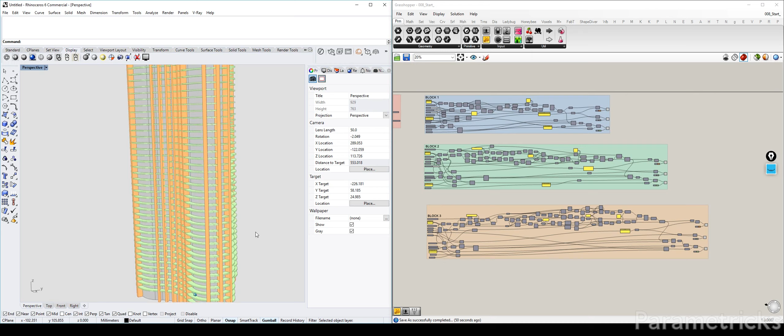In this part we will be finishing off the minor details of our tower, mainly focusing on the top floors and the glass balustrade. Those are basically the two main things that we'll be tackling.

The first thing we're going to tackle is the floor, the roof terraces. If you remember correctly on Google searches, let me open this one for example, you will see in this render, on top of each of these block sections, there is this kind of a roof terrace going on. So that's what we're going to recreate here.

Now the simplest way to do is to modify the extrusion of our core, which is the gray one. If I zoom into block one and highlight that, the green one is the core, and that basically comes from an extrusion from a boundary plane with a specific height. This height was determined by the amount of floors that we have times the height of each floor.

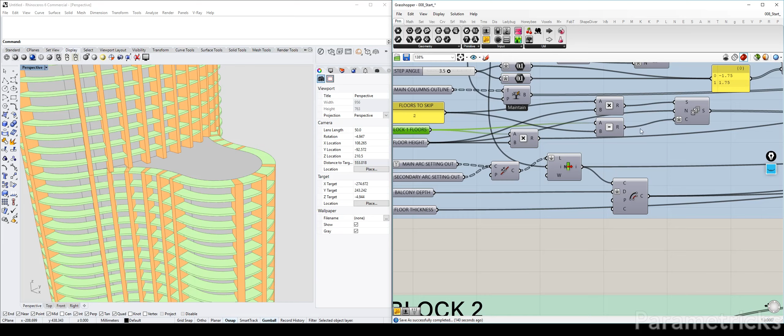So the easiest way to do this is to minus the extrusion height of one floor. Let's track that back down here. We have the amount of floors and the floor height. Since these two components are not only used for our extrusion of the core, we will not be modifying that, but instead let's have a look at where we can modify it at the end of our results, between the z vector and the extrusion direction.

So we're gonna create a simple evaluate command. You can also do this with a subtraction, because what we will be doing is basically the height that we have here minus the floor height. Let's drag that all the way down to the y. The expression will be x minus y, which is why you can also use a subtraction, which works fine.

Now that we have the number, what we can do is copy the z direction and use that one to drive our extrusion. So you can see now our extrusion is the height minus one floor. But now this creates a problem because now our tower is basically like floating. So now we have to fix a few more things.

I think to do those fixes, we can move on to the next block, which is the above, because we know if you look here, some of these columns, mainly the ones in the front, will have to run down a bit more. So that's what we're going to tackle.

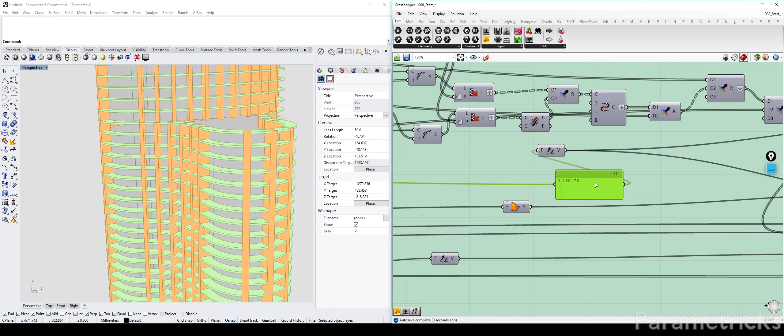So the data comes from here. What we need to do is actually swap that in there, swap the outputs of that in there, and then connect these two together. We have created a loop, so we need to get rid of that loop. And I believe this is our... I don't know what that is, but it's supposed to be our height. There we go. Okay, this is our extrusion for our core.

So what we want to do is actually move this down by the floor height of one. So let's just do a move component.

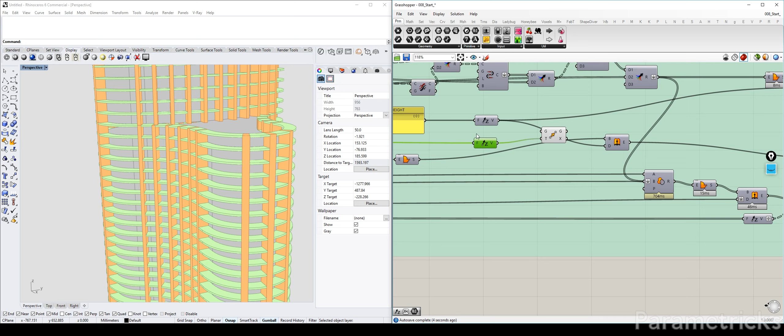We do need a Z direction, so we're going to copy one. I'm going to drag the Z all the way to our starting line so that I can easily connect it. I need the floor height, which is this one. So I'm going to connect that one here, and then drag this back to where I need them. Now the floor height is positive, so it will move upwards instead of down.

You can actually connect this to the starting surface. But I would like to keep the surface where it is, even though I probably won't be using it anymore. In order to keep our data as default as possible, since we started out on this floor, it's best to keep that on that floor. What we can do is either move the extrusion down.

Yeah, that's the lesson, so we can just do that instead. We move the extrusion down, but we're moving it up because it's a positive value, so we need to apply a negative here so it can move downward. We're going to do it on a T on the move, so do a negative X. That will move it down by 1, which connects that floor and also serves us for the next floor on top.

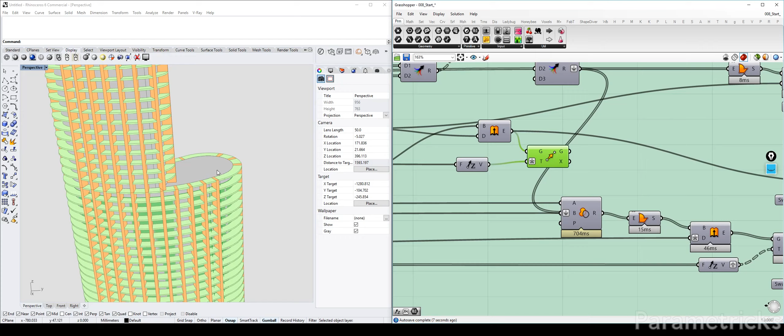Now I'm going to connect this to the geometry and add everything to the group, and then we have fixed that also. But we're not done with this yet because our column still needs to touch and we still need that green floor, so we're going to continue here.

Our columns are the orange ones. What you might notice is not all the columns need to be moved down. There's only a few sets, and if you look closely, it's actually this front set, excluding the start and the end, or however many it is that is excluded, straight. Now if you remember correctly, we have the data sorted out for us, residing in one of these components. I believe this is not it, because this one includes the last end, so I'm thinking it's this one, and it is.

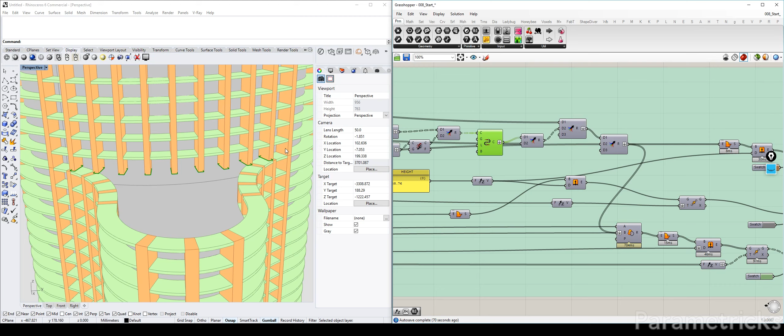So I'm expecting here 2, 4, 6, 8, 9 values, and I have 9 values there, so what I can do is actually work with this data. The good thing about it is this data is already sorted in the sense that if you were to apply a longer straight section, the first 2 columns from each end might be excluded. It might match up with the one that's below, and if it does match up, then we don't need to extrude it or modify it for this purpose. So we're going to work with this data.

These are curves, so we need to make it into a surface. We can just copy that one, and now we need to extrude this down by 1 floor. We can actually reuse our world axis that we've used here, but we do need a different extrude, so we're going to apply this one here. Since I need to use this in both negatives, I'm actually going to be putting the negative X in here instead of on the T, so I'm just going to get rid of that.

I'm going to connect it here, and there's our columns. So I can actually now either merge these two - oh, I don't know what I did there - merge these two together. Or you can just plug it in here and bake them all together, or you can merge it, soft merge, or you can actually just solid union merge this together.

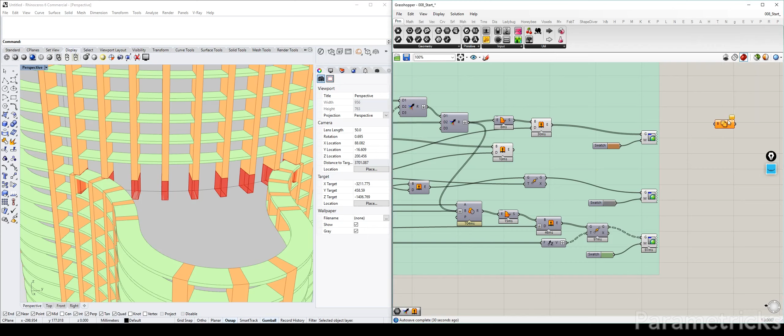Well, zooming in with my mouse causes some issues. I'm actually quite curious how they solve this in the actual build, because if I look at a photo here - I think I saw it - for example, this one, you can see that they don't align, so I'm pretty curious how they will solve that, or they will probably just leave it in there. But as it stands, you can modify it however you wish, or you can just leave it as is, which is also fine.

So we're trying to eliminate that, and that is more apparent in the next step. What we're going to do is we're missing a floor.

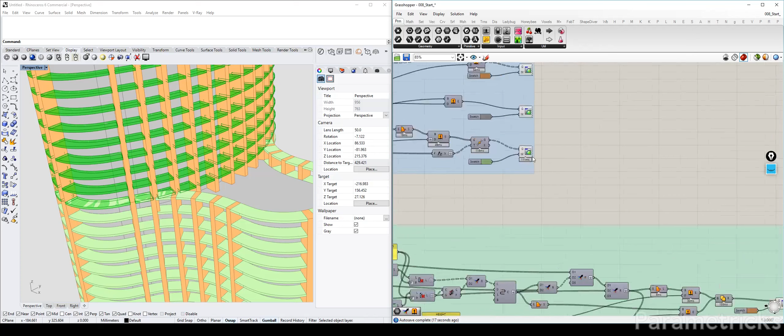But if I were to select the floors, you see that they're all selected. And if I select the floors from the block below, which is block 1, they're also selected. So they're overlapping, and the overlapping is already clear on my viewport. And if you were to bake this and try to render this, you will have issues.

So what we want to do is merge either the top one with the bottom one, or the bottom with the top one. So it's a choice we have to make to say on which of these blocks we are going to include the floor. Are we going to consider that belonging to block 2, or are we going to consider the top one belonging to block 1?

Now, because we are already moving from bottom to up, I would advise to move this floor, or this last floor, to block 2. So we're going to actually be eliminating it from block 2 — I'm sorry, eliminating from block 1, but moving this top floor to block 2.

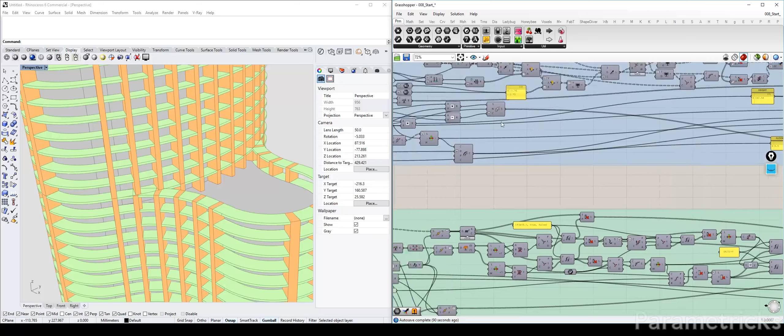So here's what we're going to do. Since this is our move, and that comes from a series of z-axis that defines how many times we're going to move our floors, we can actually trace this back a little bit to our series, because this ultimately controls how many floors we're going to get.

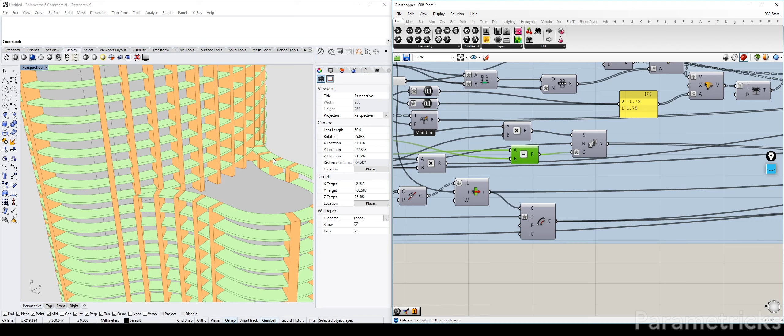So instead of saying this is floor to skip on the bottom, what we can do is, instead of putting this axis because we needed that one here, we're going to eliminate that. We're going to set this back to not plus 1, just leave it as is.

And you'll see that the floor disappears because we are not including the top floor anymore.

Now what we need to do is actually copy the outline of that floor, and then we need to find that by coming back in here, which I think is this one. So if I go back quickly to select it only.

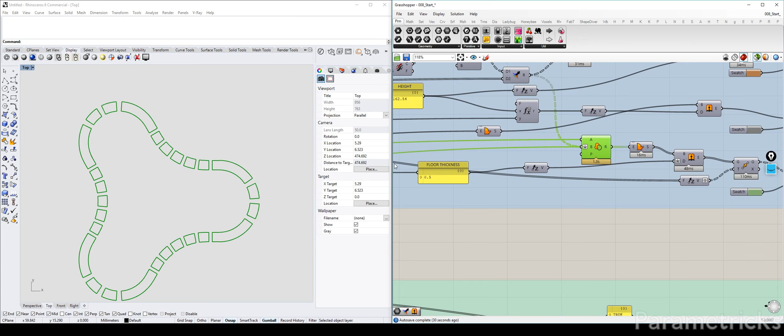So we need to copy this to our upper floors. And one easy way to do that is obviously just take — actually I want to take this one instead. Or I can just take the curve and then remake my boundary surface, which is also okay. But let's take the surface and see how that works out first.

So I'm going to take that surface and give it a logical name. I'm just going to call it block 1 floors outline. And I'm going to hide the connection line to make our code not too messy.

And I'm going to put that also — or is that the one we already have? Wait, let me see. Nope, that's just the columns. So we do need this one. I'm going to add this to group. And now I have this geometry.

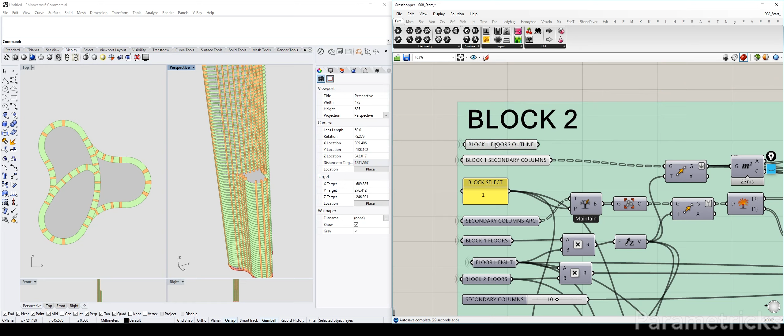What I can do is I want to move this geometry. Now it's at the bottom of our tower there. What I want to do is move it up to the level same as the bottom of our block 2. So let me identify where it is first.

I think it should be in a later stage. This one.

So what I want to do is, I do want to say skip floor 1, but at the same time I want to do a region join, region union from — let me make some space here — from our original, actually let's make a merge instead, let's keep it clean that way.

From our original, I might have to move everything a little bit to the side in order to give ourselves some space. I'm going to merge that with our first floor outline.

Oh wait, no, I still need to move that up. So what I'm going to do, well, I want to keep it here, but I don't want to move it all the way there. So I'm going to just create a copy of the exact same thing.

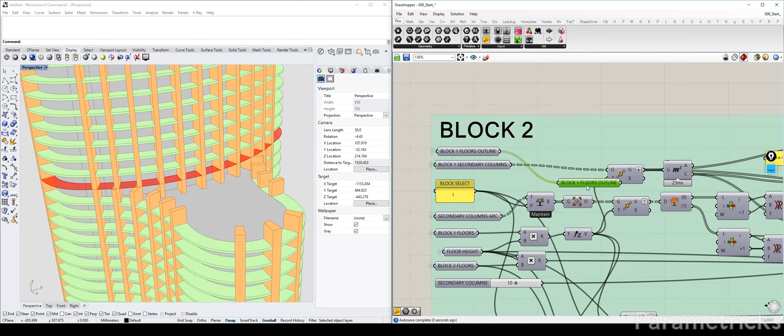I don't need to hide the lines, though I don't need to see this, so I can hide those. I can also hide this one. But I'm bringing this part with me all the way here so that it's easier for me to work with them instead of just dragging up back and forth.

Okay, so one thing we need to do is make sure that this is on the same level as this one. We can easily create a move, which I think is this one. So we can actually do a move of that using our height vector.

This is missing one floor. Aha, that's because this one was starting way lower.

Okay, I have a better idea. Let's do it this way instead.

So this is our surface. How many surfaces do I have here? Oh, that's a lot of surface.

But I do know that this is the surface I need. So what I'm gonna do is just do a surface evaluate. We've been doing a curve evaluate a lot, but we can also do a surface evaluate.

This basically works the same as a curve. Instead of one dimension, you have two, so that's why you have a UV. So instead of a slider that's a singular number, you can do an MD slider, which is a multi-dimensional slider, which gives you two. And the same works in here.

So if X and Y, or U and V, is 0.5, and your surface were reparameterized, you will always get the middle point.

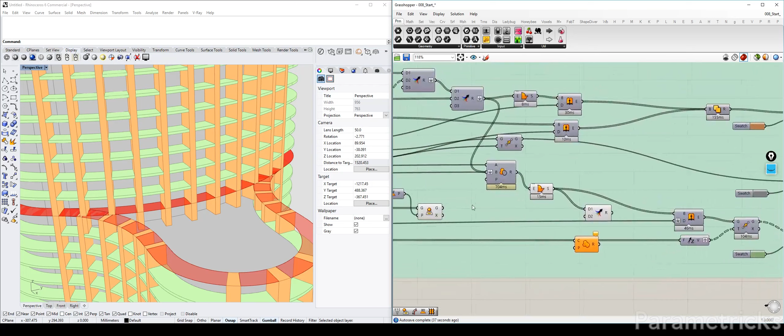So with that moved, I'm gonna put this back into the merge so that I can have these two together. I'll probably have to flatten this part so that I have these, and let's see how the merge turns out.

I'm gonna actually go to plan view and turn on selected only. So this is what it looks like for our merged component.

And there's a little kink here. That's because there was a column there that eliminates it.

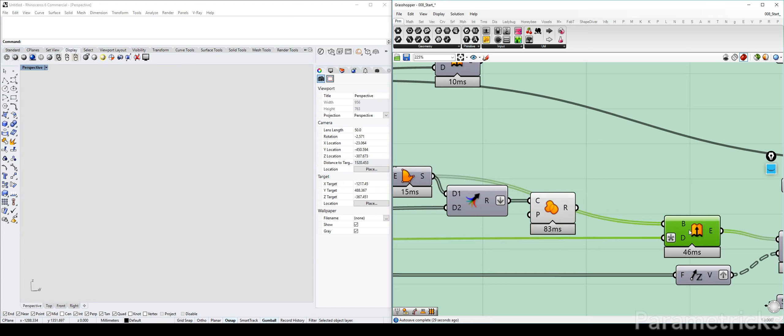So this will eliminate our problem of having duplicate faces on top of each other.

So the only thing we need to do now is—this is for extrude down—so we can actually just copy this one and extrude one floor down. We don't need to extrude the whole floor, so that's fine.

Oh, we do need to identify. We do need to boundary surface this, or you can actually just start with the line. That might have been better, actually.

So you don't need—oh, but that one is needed for that part. But that's okay, so we can just do this.

We might want to do a Boolean union. Oh wait, they don't touch. These and that don't touch, so we don't have to do that.

But what you can do is put them in a merge, just to make it a little bit cleaner when you bake. So when you bake, you don't have to select two components—you can just select the merged component, and you can bake everything in one go.

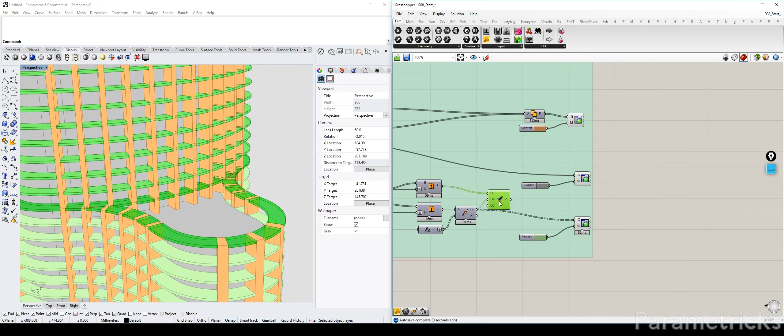So I'm just gonna remerge this together, and I'm gonna flatten that. Sorry, flatten this, I mean.

And there we go, there's the line. I don't want to see that line. There we go, now that line's gone.

Okay, so now we've successfully fixed our sort of roof terrace. Now let's move on to the ones at the top.

For the one to the top, what you can do is you can also either leave the block here, or you can actually do the same as we did in block 2, which is move the core down by one floor, which is this one.

At least I can't find an image of that top floor, but I imagine that there is probably a top floor. Maybe, well, this is not that tower. I can't really find it. So I'll just assume that there's going to be one there. If there's not, then that's fine.

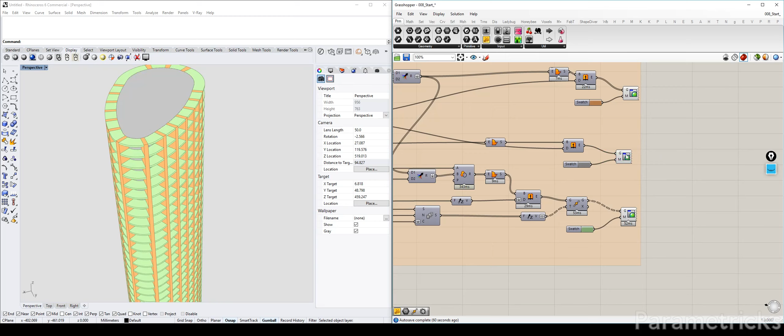Then we just not move it down, but instead extrude one floor down in that bit there. So that choice is up to you. But I do prefer to have the consistency of having a roof terrace on top of every different block. So that's what we're gonna do.

So I'm just gonna put in a move here first, and I'm gonna move at the end. So I'm gonna create a Z, and I'm gonna drag it all the way until I find my floor height, which is this one. Floor height goes into here. I'm gonna drag this, keep on dragging it.

And here I'm gonna do a minus because we want to move it down, not up. And we want to move our core, which is the gray one, like that.

So we have now solved it for that part, and now we need to do the same basically for the columns and for that floor. For the column, it's easy.

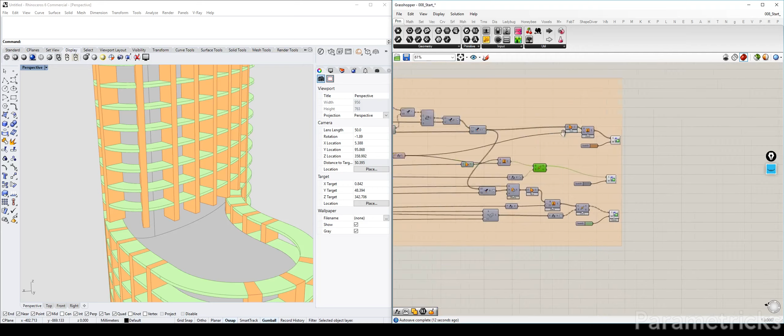I think we have the same here, although it's a little bit different for this one because our selection is actually including only the, what do you call it, the front part, this part. So we need to select actually 2 for these 5.

And do we need to select this one? No, these are actually corresponding to the one below. So for this part, we actually need to define a different strategy in order to select those.

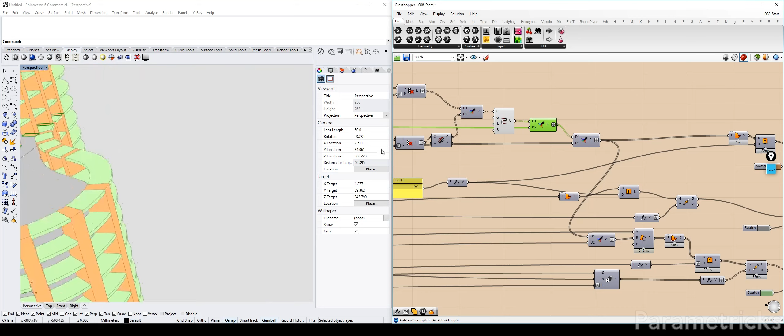You can probably, oh, let me move this back into place. We can probably use some sort of smart sorting based on the floor that's below it.

So I'm actually employing two strategies that do exactly the same thing, so you can see which one works for you, that you might want to employ also for that one. But the logic that we use for that one is quite clear, and I doubt that it will change, but for this one we do need to take a different approach.

So that's what we're going to do, and we're going to analyze it, how we're going to do it, and then we're going to start implementing our analyzed solution. Here's what we're going to do.

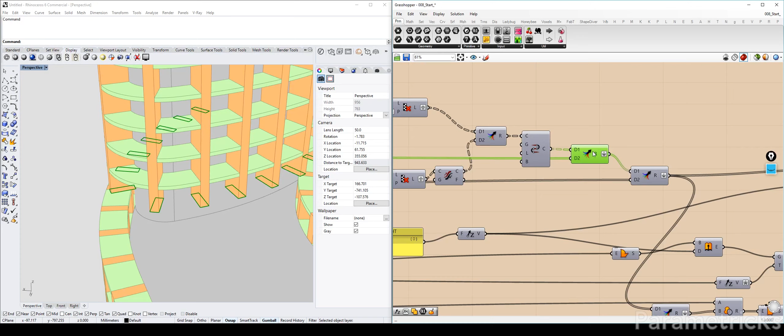We will take the outline of the bottom floor that's below it, and sort of make a comparison along the lines of: if the columns, let's say we break down these columns into 4 points, and 2 of these points do not reside on that line, then that means the columns are not aligned to it.

So for example, let me try my drawing skills again. What I want to do is extract the outline of our second block, which is going to be this one. Obviously it will run all the way, and I'm gonna say if 2 of these points at the corner fall on this line, then I don't want it.

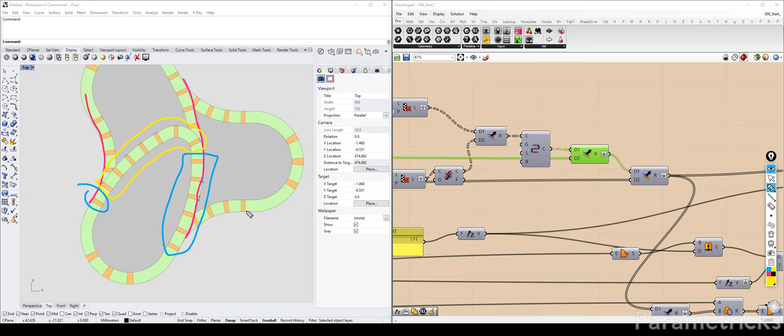What that will do is it will probably eliminate these columns for me, and it will eliminate that column too, and what I will get in return is going to be these columns, because they don't reside on that line, or at least they might have 1 point that resides on the line but not 2 points, and that's going to be my sorting process.

And since I'm not selecting these, they're not in the filtering process anyway, so I don't have to worry about those. So that sounds to me like a solid plan, so we'll have to implement that and see how it works out.

So first we have to get our outline from block 2. And where can we get that? Actually, we can get that outline from here. We just need to identify it as a different block. Or much safer is to take it from here.

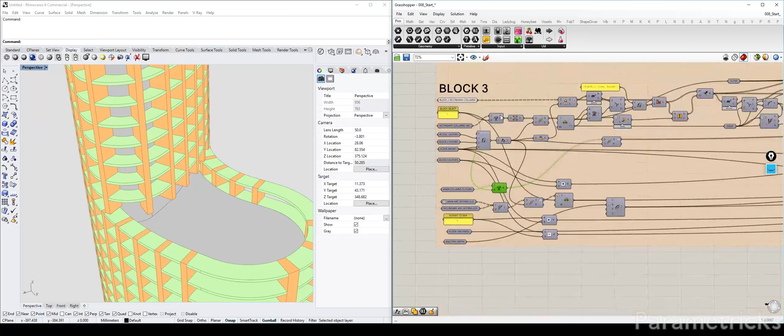Or I can just say block select minus 1. That can also work. In that way, we are actually keeping everything under from one input that's all the way in the beginning. So I think this is the main column outline, main section outline. I think it's this one. Let's have a look.

We select it here. Okay, so we need to copy this one, and the I index will have the x minus 1, which gives us that outline. Now the only thing we need to do now is move it in place, because these are at the bottom, or this one is at the top.

Oh, because we already moved it. Well, that saves us the trouble.

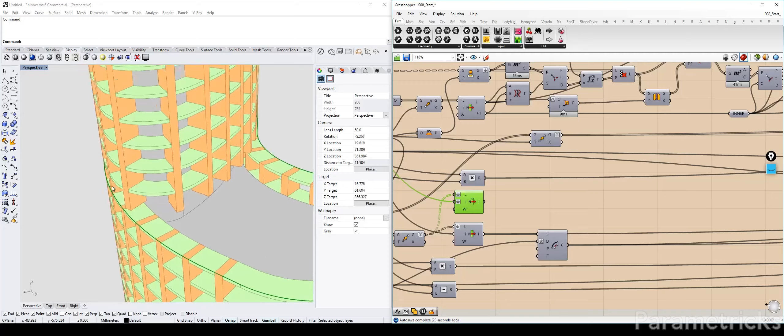Okay, and now what I want to do is, in order to find out if these columns reside on that line, I have to drag it all the way up here actually. Oh, but I don't like these curves too much, so I'm just gonna create a duplicate component.

We're just gonna call this block 2 floor. Actually, it's the main outline, it's not the floor, main outline. Okay. Well, no, it can have a name like that.

I'm gonna move this one. Where am I thinking? I think it will probably be manipulated somewhere around here, so I'm gonna drop it in here. Okay.

So now what I can do is I am going to explode my curves, my colored curves. Well, exploding this one gives me how many vertex? 5, and that's because the start and the end is counted as 1.

I can also just do a duplicate points remove using the kangaroo component, but what I can also do is use discontinuity instead. And what discontinuity does is it will split your curve on very sharp corners. And if you have not selected any of these two, you will have 4 points, like on this list here.

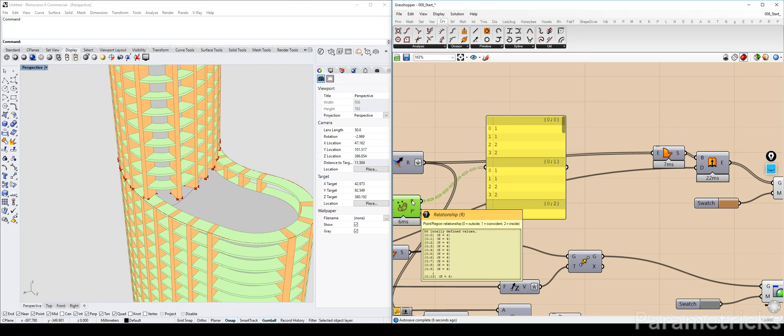So what we can do with this is, in theory, let's say the columns that are fully inside our enclosure should have probably a value of 4 times 2, because if a point is inside, it's counted as 2 points. You can read it as that.

And if they're coincident, meaning they're sitting on that line, then there's 1 point each. So for our column that's sitting right at, let's say, the column that we don't want, in this case, let me recenter my camera a bit.

So for example, let me take a draw. For example, this column is likely one we don't want, and we have 2 points sitting on it, which is coincident, and it gives us 2 points on the inside, which gives us 2 points each, which is plus 4. So this will give us a maximum value of 6, okay?

While this, so let's assume that we have a column where 1 point is sitting right on the edge, which is fine, then we just count it as 1. And we have 3 that are sitting obviously inside. So it will be 3 times 2, which is 6, the minimum, okay?

Because this one can either be 1 or 2. So we have, let me erase that instead because it's actually quite... so 2, 6, so 7.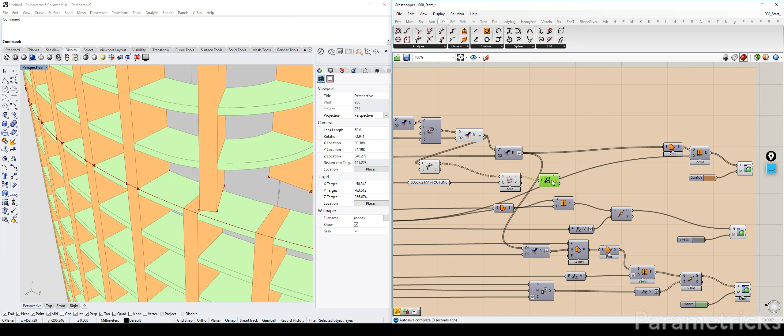So that's what we're going to do. Let me take that out. I'm going to move that. So in order to convert all these numbers that we have on the list into one single digit, what we're going to do is a mass addition, this one, and I'm going to pull up an evaluate command.

I might pull up a panel also. And I can already see I need a lot more space here. Let's make that my default color so I can recoup that later. I'm going to remove that, remove it all the way up. These are going to be moved up too.

So suddenly my formula is going to be, if x is smaller than 7, then I don't want it, which is false. If it isn't, then I want it, because that is true. I'm going to plug that in here, plug this one in there, and I should have a list of true-false values that will help me if I cull it by pattern.

This is my pattern, and there is basically one column each per data branch. Since we flattened this part, actually we need this part instead. This one is including the back column, the main columns. Since this one is flattened, I might want to move this up a little bit just so my wires are a little bit readable.

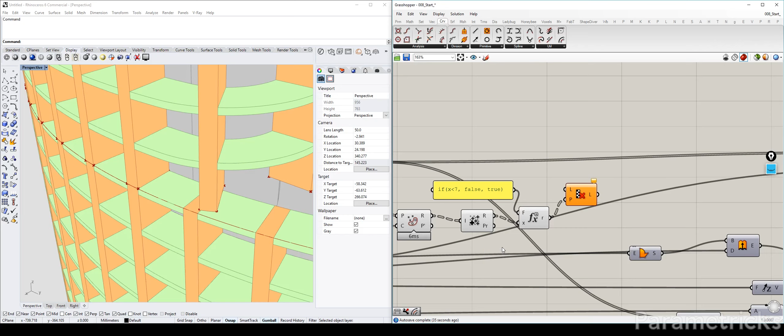Since I've already flattened this, I might want to flatten this one too, and I will flatten it here. And I can connect this one here, and I can hide everything except for that one. You can see from my selection, I already have selected the ones that I really need.

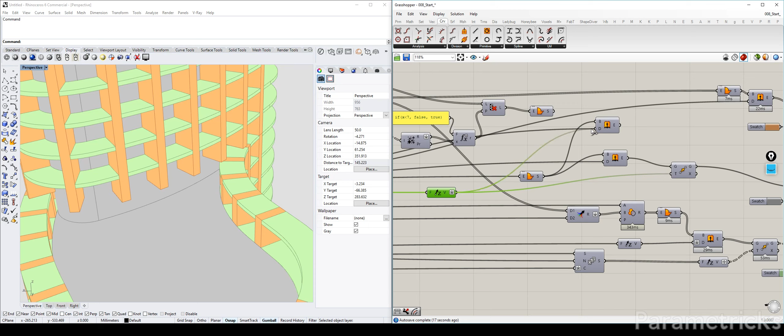So now I can continue the normal procedure, which is create a surface out of it and extrude it down by 1 floor height. Do I even have it here? Is that 1 floor height? This is 1 floor height, the one we use to move our core down. So we can plug that in there, plug this in here, and there you have your columns.

I'll move this even more because now the other part comes in, which is from the floor. Okay, so I need to now find out where is, it's a different region. Is this one? Yeah, because this one is the floor that we need to combine it with.

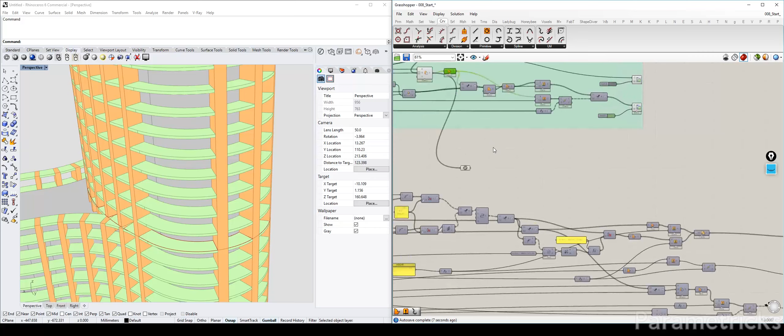I'm gonna copy, actually, what's the naming convention I used here? Just gonna copy that, and do a CRV, copy this into a curve. Actually, I didn't copy that curve, I copied it from that surface on the previous one, but it doesn't matter because in the end we saw that we also need to resurface that. So this time I'm just gonna copy this.

You can actually correct it in this one also. This might be a good exercise for you to try to correct it yourself, and if you can make it work, then you probably understood that part.

So for this, I'm just gonna copy the curve instead of the surface, and do the same thing here. I'm gonna put it next to this one, wire hidden, and we need to move that all the way, oh my god, all the way up here.

And in the previous one, we made a projection plane, and the projection plane came from, I believe, this one, which is the base surface. So I'm gonna do an area, project that one. I'm gonna create an XY plane from that point, and do a project to plane, which is this one.

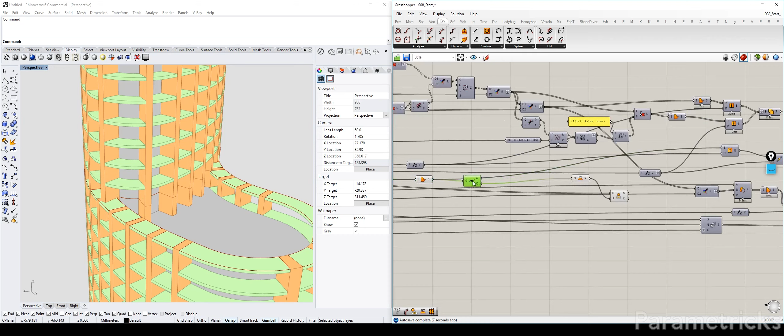That's my plane. I'm gonna drag this temporarily here in order to connect this, and I'm gonna hide that, and drag it back away here. I can actually probably move this a bit here so I have a bit more space to work with.

Okay, now that we have our columns from the bottom one, I need to find, let's merge this. I'm gonna merge this one here, and the other one I believe is this one. Actually, no, I want to move this one a little bit down. It's this one, way up all the way here.

I need some space in this one, so I'm just gonna nudge it a little bit like that, just like this. Okay, and now I can do a region union like that. This one needs to be flattened, of course.

So now I can hide everything and check my results, which has this kind of look. Not bad. Okay.

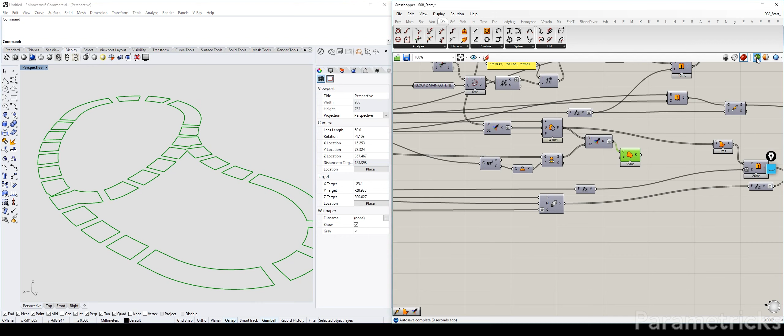Oh, we forgot to do one thing though. We need to make sure that the block 2 floor is -1, so it doesn't include the top floor, which is this one. We know it comes from a series. Oh wait, these are the ones - it comes from here, and we need to remove the x plus 1, because we don't need that extra floor anymore.

Okay, now that's settled, we can come back here and do a boundary. Extrude by 1 floor height, which is that number. We can reuse - let's do this instead.

Because this one I can already see, judging by the number, you can see the vector 0.5. I just remember that is our floor thickness. So if you don't know, you can just track that back down and apply that one.

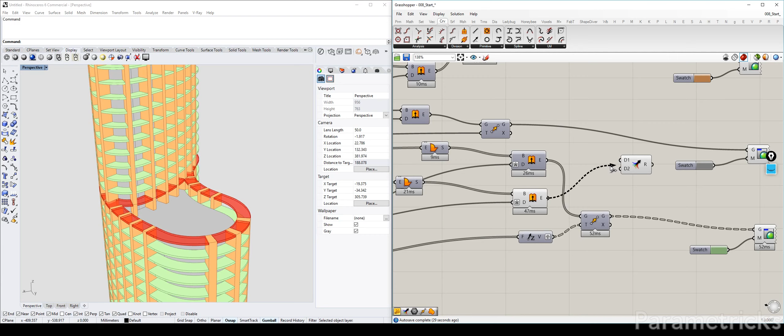Okay, so now we have to move, and now we just need to merge. How are we gonna merge it? We're gonna merge it like that one, perhaps. You don't need these three, just need to merge it down there, and we can probably flatten this part. And there you have it - there you have all the floors combined, and no duplicate faces.

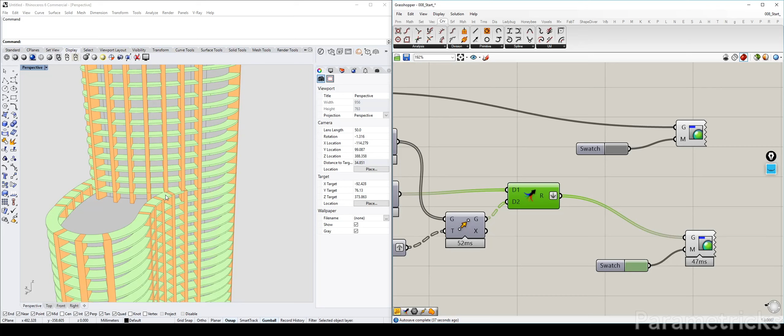If you want, you can also combine all the columns together so that you don't have that issue. But in reality, your column is going to be probably a different color. But for these kind of exceptions, you're either better off doing a manual culling, or you just slightly move your column back down a little bit, or you combine those two together, which is also doable.

What I mean by combining these together is, before you plug it into this one, you can say I want the floor to be excluded from the columns outline. So you can take the column outline here and do the same exclusion that we did here, so that you can get rid of that one.

Okay, I think the top one doesn't need to do anything. So now what we're gonna do is I'm gonna actually group this again, and I believe there might be some loose items in there. Yeah, see, there's a lot of loose items in there. So what we're gonna do is select everything and add to group, so that they are in the group, and then they move together.

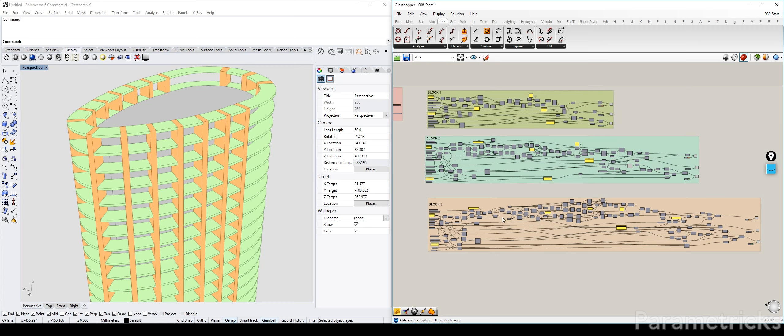So the next thing we're gonna do in this last part of the tutorial is make a new parameter which we'll call glass balustrade, and we're gonna utilize that in order to make our glass balustrades. So that's the last thing we're going to be tackling in this tutorial.

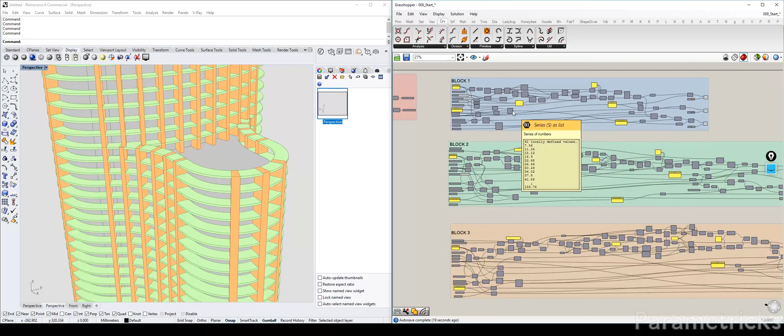Okay, to start, we need to find a way to filter out the curve that we can use in order to generate a glass. One way we can do that is using our floor outlines. For example, let's track down a floor outline here. Of course, we don't need all the floors. What I suggest is do the same thing we did for one floor, then copy it using that component right there - the same strategy, just copy it to the floors we have.

But first we need our outlines, which I'm just going to use this to identify - this one. So I'm going to extract it away, and take it from the curve. That works a lot better for me. I'm gonna make a curve outline, and call this... floor outlines.

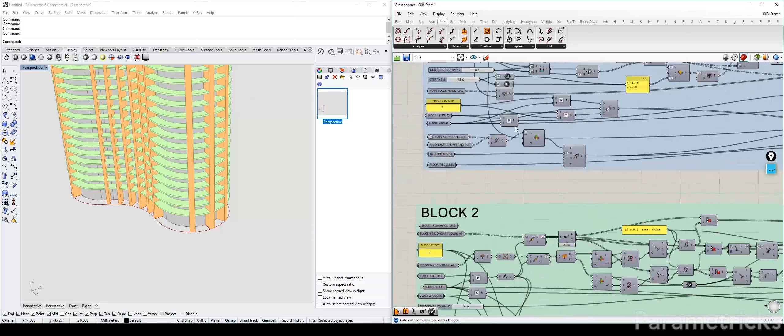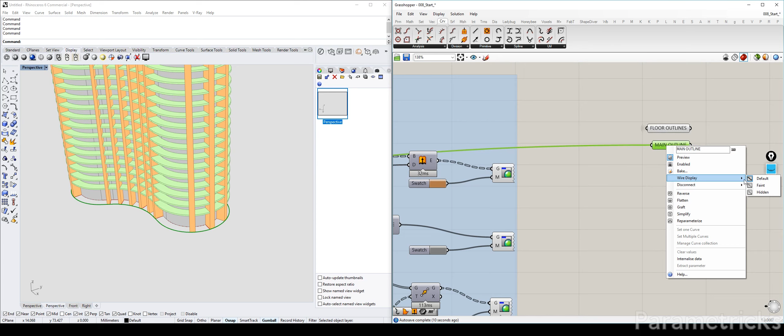I'm gonna use an invisible connection, and obviously I'll also need a main outline, which I think is this one. Yes, so I'm just gonna extract that also - main outline. I'm gonna move this also to here and hidden.

Okay, let's turn off the other floors and focus on this floor, because once we have this first floor done, the others will be much easier to do. I'm gonna disable my core - yeah, I like that, I'll just disable everything basically. So now you have the outline. What I want to do is select the outer curve because that's where our glass will be.

And what we can do is we can actually explode all our curves, but we don't want all the inner ones. So we need to filter out the ones that are not on the outer edge that's overlapping with our main outline. So we're going to use the old trick again, where we compare the distance of the curve, or to be specific, the center point of the curve.

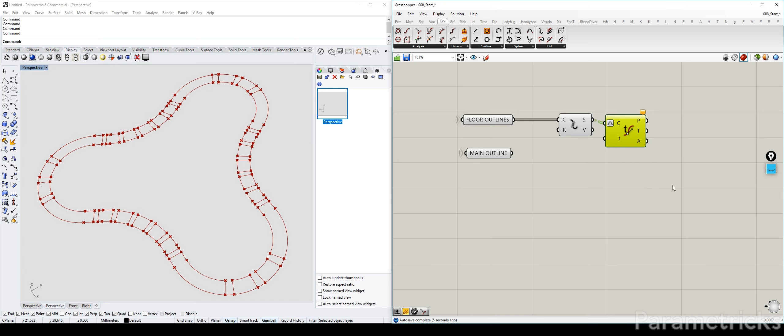So we parameterize it, evaluate curve at 0.5. Here we have a curve, and then we're going to do curve closest point. With this, I'm going to do an evaluate, and the evaluate expression will say if x is closer than a tolerance of 0.1, then I would want it, because then it's true. Otherwise I don't. So if I connect the distance, which is the d here, and then use a culling pattern for our exploded curve to the list, pattern to the p, there you have it, all our outlines.

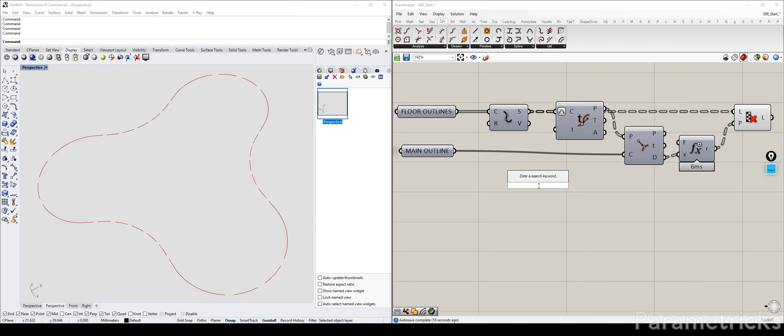So with this, now what we can do is we can start to manipulate it a little bit. We can start to create a few parameters for ourselves. The first one, I would say, since your glass is probably not sitting on the edge—I mean, if you want it, it can—but let's just create a parameter for that.

So we'll do 0.05 is smaller than 1. And what this parameter does is it offsets the glass where it starts from the edge. So we're going to call this offset from edge. Very, very original.

I might do a number in between because we can probably reuse this for the other two blocks. So I'm going to just call it tap one, just so I can have the text. I might hide this for now. That's the offset, this is my offset curve. Okay, this one offsets to the outside. That means that we need this one to be a negative x, so that offsets to the inside.

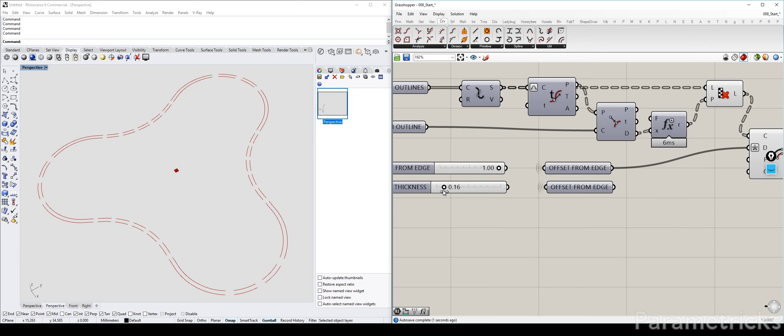Now that we have this, we can actually copy this again, and we're going to call this glass thickness, which is again another offset. Let's start with 15—I'm not even sure if that's the one we want. We offset the curve that has been offsetted using this one, but this one will determine your—how do you call it—your glass thickness. Oh, we're actually in millimeters.

We don't want to be in millimeters, unless you want to make a tower that's miniature. So we're going to go to meters. This means that this glass thickness now has a thickness of a whopping 16 centimeters, which, mm, is doable. I mean, yeah, it's doable. I think right now there's a project I'm working on that has a glass thickness of 10, 10, so 2 times 10, 20 millimeters. It's just quite thick.

So for our purpose, we'll just drop that down to 15. I mean, it's adjustable—you can adjust it however you want. And now what we want to do is we want to merge these together.

So if I zoom into an example, I don't need to see that one again. This one goes in here, this one goes in here. Make sure the data tree is okay. I don't need that one. What we want to do is basically this one to be grouped with its offsetted neighbor.

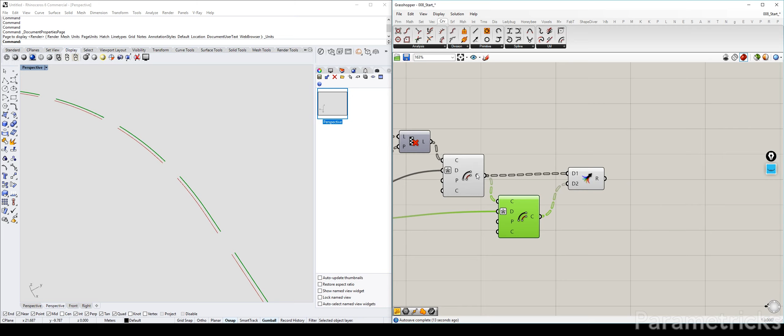And since our data tree is already, how do you say it, grouped in a way that it's—well, it's grouped in the right way, this is the way I want to say it. But actually, if I look at this, there is a tree that consists of 2 elements. I want to explore that. I want to see why there's 2, because I'm expecting 1. Why would there be 2 curves in the same data branch, unless that's where they come from?

I'm not expecting that, so I'm just going to go ahead and explore using a data tree branch. Simplify that, and I'm going to see branch number 0, see what that is. Okay, so I'm selecting 2 curves. Oh right, of course—when you explode a curve, we have a part of it that's straight, and that's why I exploded that part too.

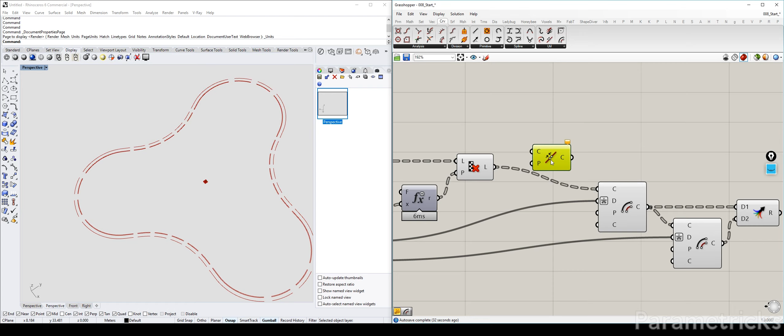So we actually need to do something else before we do all this, otherwise it will not go well for us. Actually, we can do it here. What we want to do is join the curves together, because I don't want to see two loose curves that can be joined. So we're going to join that, and plug that in. Nothing changes except that the curves that are next to each other are now joined into one item. And we can actually simplify this, and then you see the data structure is much cleaner in here.

So now if I do a connect, I'm pretty sure I need to flip one of these curves again, but we'll see. Yeah, exactly, let's put this to position. Let's flip our curve. You know what, let's flip the top one.

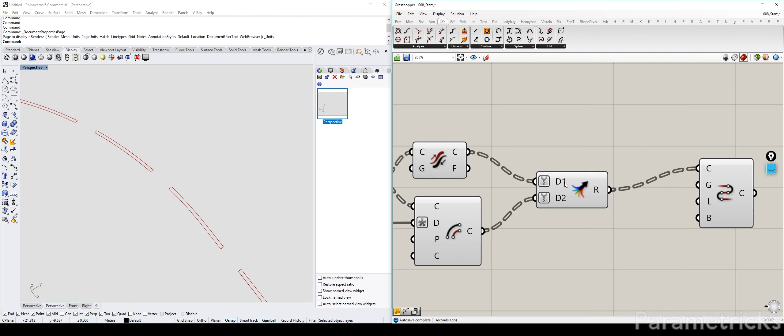Oh, data branch doesn't match anymore. So we need to simplify this and simplify that one, so that we have one level of data branch, and this one also one level.

So there's our glass, basically. And now what we need to do is extrude this based on a glass height.

Okay, well, glass height can be a little bit different. As low as 1 meter, or actually as low as 0.5 to 2.5 if you want that much glass. I'm gonna leave it at 1.1, seems doable for me. And I'm gonna extrude in the z-axis.

Obviously doesn't make sense to extrude your glass horizontal. Interesting though. And that's gonna come in here, and there's our glass. And now I can enable my tower again.

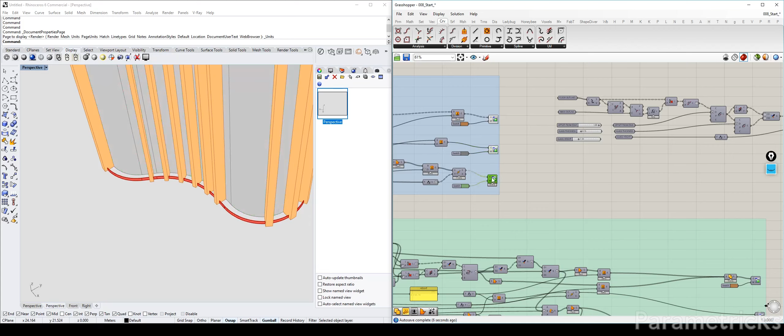One thing I now need is the data that we use for our floor. So how am I gonna do this? We can, I think I might just copy it from this one here. Let's do a number.

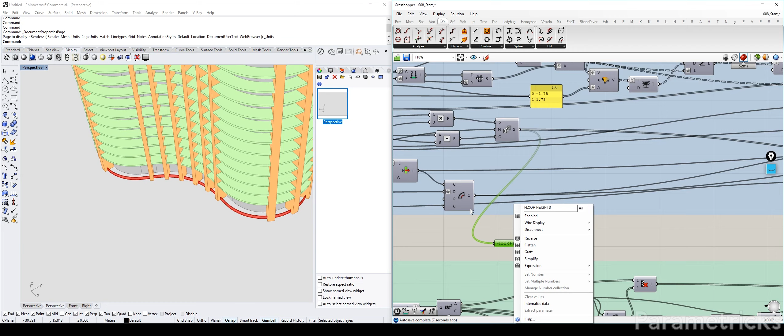I'm gonna take that one, and I'm gonna call this floor heights. Does that make sense? Or if it doesn't make sense, just give it a name that makes sense to you. And then we have that.

We can put in our own z-axis in here, and then we're gonna say move all that we've created. Oh, no, don't do that. Like that. I'm gonna disable this one with that one.

And suddenly we have glass, although our glass is offset way too much because we put in a 1 meter offset. What's our minimum again? 0.5, 0.05, which is quite close to the edge actually.

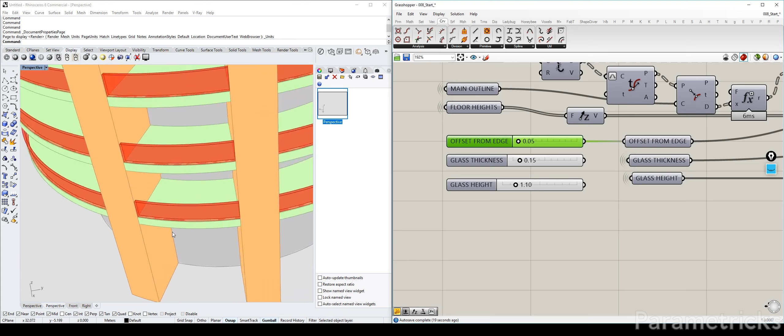So let's do it to, I don't know, 10 centimeter offset from the edge. Yeah, that works nice. Okay, there we have the glass for that part.

Let's give it a nice color by using, actually let me just copy one of these, makes it easier. And like that. Glass is usually blue, I think, isn't it?

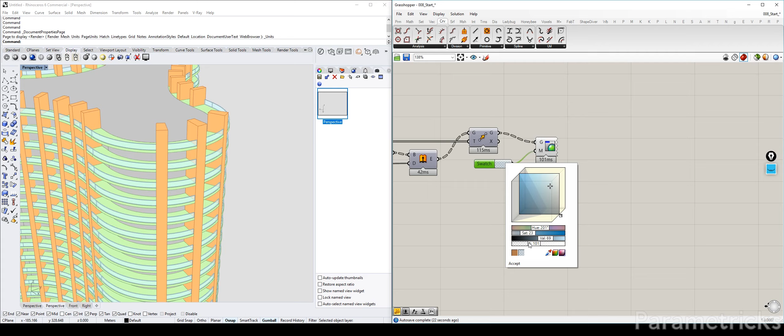Well, depends. Unless you go for low iron glass, then they're not really blue. But we can make our glass into low iron by adjusting the alpha that we have in here. Something like that, perhaps. Not all low iron, but low iron enough.

Anyway, so let's give it a name. I'm gonna just copy and call this block 1 glass balustrade, like that, and group this into a blue group. Give it a nice blue color.

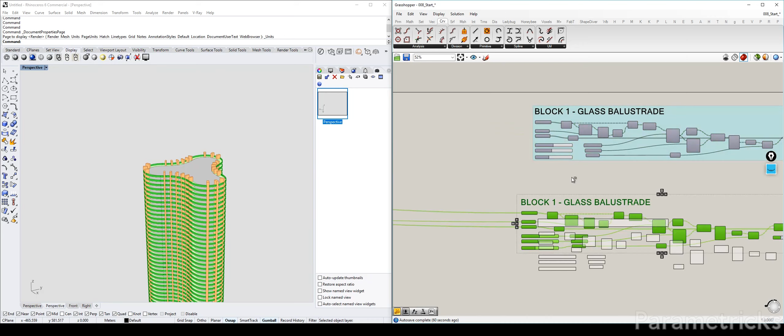And the good thing about this is I can just copy this without these, shift copy. What we'll do, actually without these, is I need to reconnect this like that, like this. And I'm gonna try to connect it for the second block.

Okay, so the first thing we need, floor outlines. Floor outlines came from this one, I believe. Yes, it does. So I'm just gonna do this.

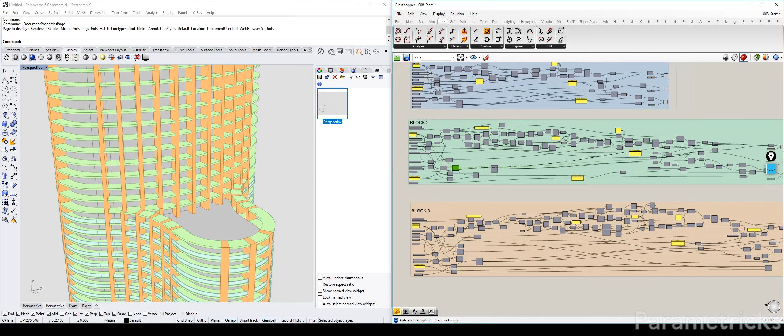Main outline, main outline. Where is my main outline? This one. Copy this one to here. Floor heights. You can see already a glass appearing up there.

Floor height, for the floor height, there might be an issue, but we'll see what happens. It's from a series. Yeah, so remember that we adjusted our floor height actually from this one. It was x plus 1.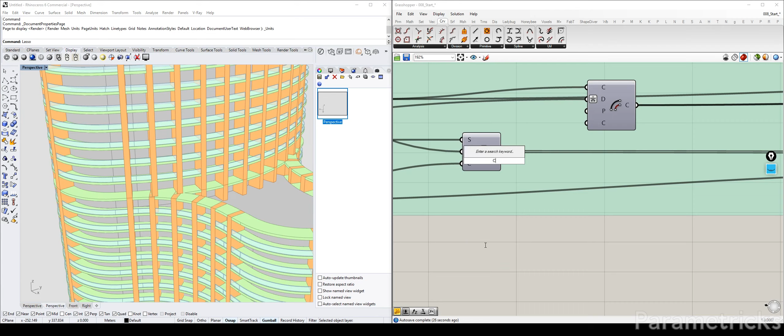But actually, let's look at the top. The top looks okay. The reason why we didn't do x plus 1 is because we had to exclude that number. But what I suggest to do is bring back the x plus 1, but instead at the output we are going to call the index that we are supposed to leave out. So I'm going to come back in here and say x plus 1.

This might create some errors because now we have a duplicate, I believe, duplicate floors. No, because we have now the floors that's on top. Or actually, wait a minute.

We skipped the floor, so we actually need to add the value back in here. Actually, let's do it this way then. Let's leave this alone as it was, and we're going to add the floor back into this one.

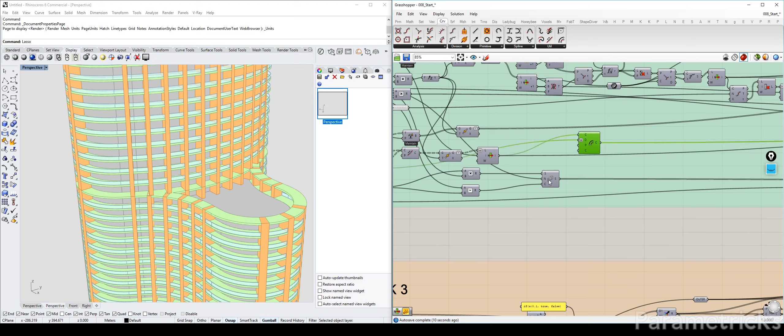So what we're gonna do is we're actually going to... this one is okay. We're actually gonna do, oh no, we're actually gonna do that. We're going to remove our starting point so that we end up with one less, and I'm gonna actually be using this one instead for our floor heights. There we go.

And this should be right up to the top. For this one, we will need a x plus 1 though.

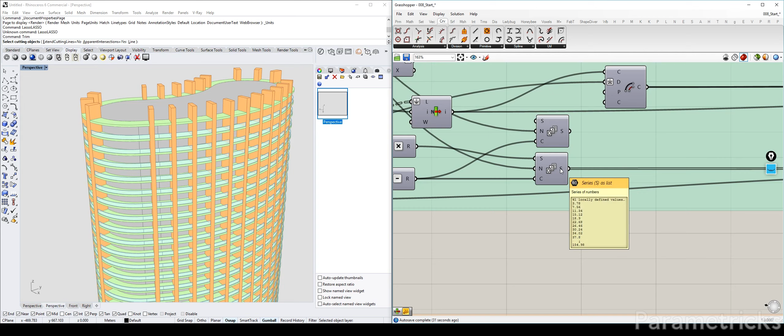Actually, thinking about this, let's see, what are the data that we need? X floors. These are the... okay, I get it. Okay, I have an idea. I have an idea that's a lot better.

Let's just take, where is it? Floor height, and add it to our... oh, we do have floor heights here. Oh, even easier. Oh, that's different floor heights. Floor height and floor heights.

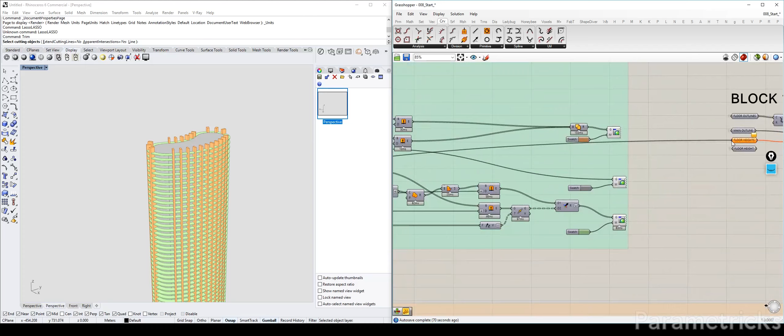There's a difference. What we want to do is I'm going to actually connect this back to the original. Okay, sorry for the confusion. And I'm simply going to... actually, do I need this? Do I need this? Because I already have the data. Okay.

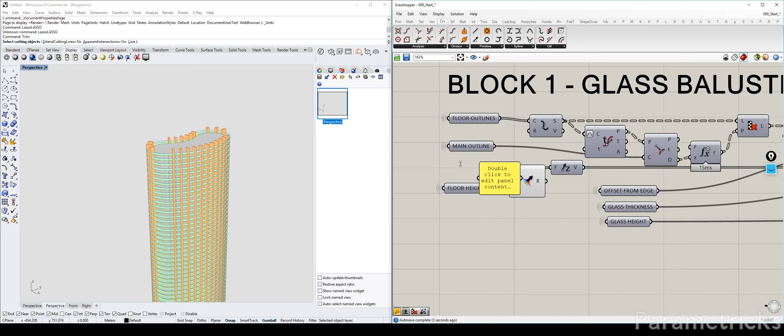I'm just going to add my own floor, the zero floor here, which is a 0, because that's where I should start. I'm just going to add this to here and there, and then we can connect this. So I'm basically adding back a 0 number into this number list so that we can get that floor that we actually culled away for our merge of the overlapping floors.

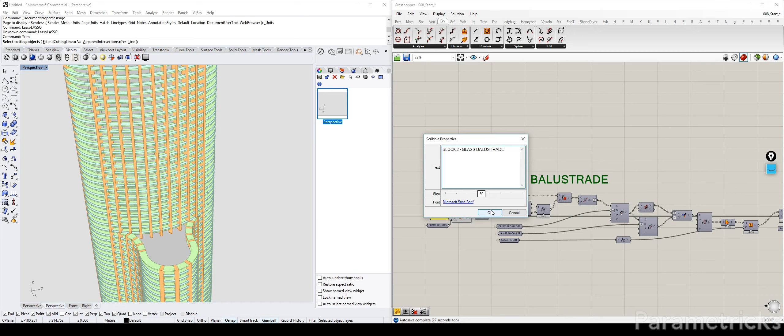We don't need that here because if you do that, you'll probably have a glass that's on the bottom level. So that's a minor difference between a block—oh, we need to change this one also, block 2 and block 1. But this should be the same as for the previous blocks.

I'm going to actually make this in default color so that I can easily group this into the same color. And now I can actually copy this to the last one. So let's enable our last block.

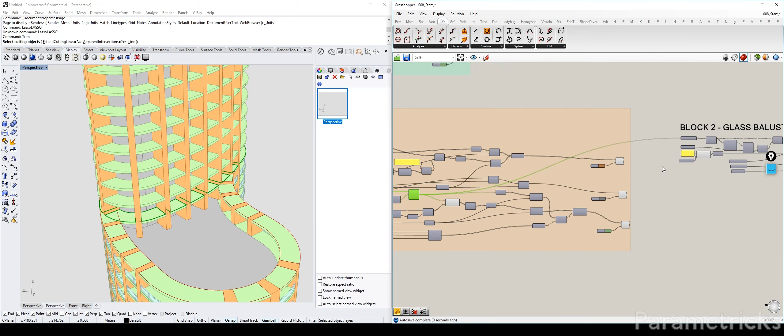We need floor outlines. Floor outlines comes from a region before region join, which I think is this one. This one. Because we don't want glass to be here—I mean, you can if that's part of your design. This is a list, which is this one. And our floor height is a series, which I drag all the way up here.

This one still has the +1 because we don't need to eliminate the... so we might have to disable some of this, we might have to get rid of one layer here because then we have glass that's on top of here. Exactly. So let's do this.

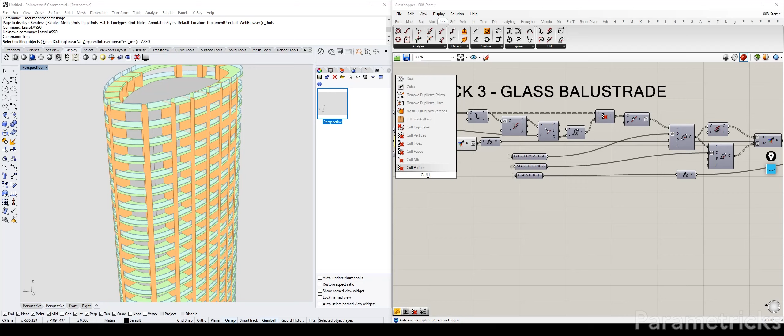Oh, and for block 3, very easy fix. We'll just do cull index, and we will be culling 0—not the first, but we're going to reverse our list, reverse this back so that we can cull the top floor. A double reversal process again.

Let's move this all into a nice group like that, and save. And there you have it.

The World 1 residential tower, as far as the original design and the building of the outer shells.

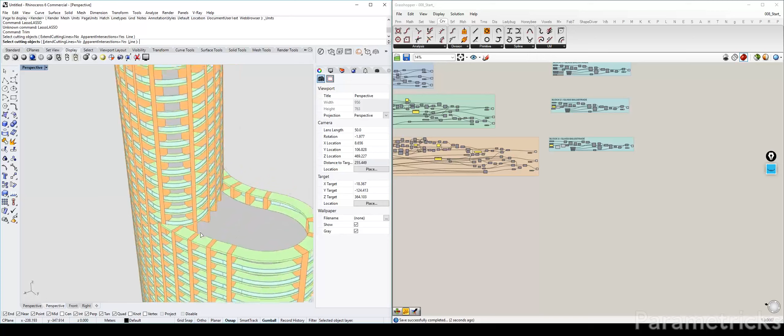So now you can actually go ahead and play with—oh, you're right, this is temporary. So you can actually keep this temporary or you want to remove it, it's up to you. If you want to remove it, just connect this one to this one and you'll be done. You can just delete this one entirely.

So now if you were to say, okay, I want to have a higher floor, then you should define that, or you want to make it into a very bigger tower, let's say 50 radius. Not sure how that will turn out. Hopefully it won't break.

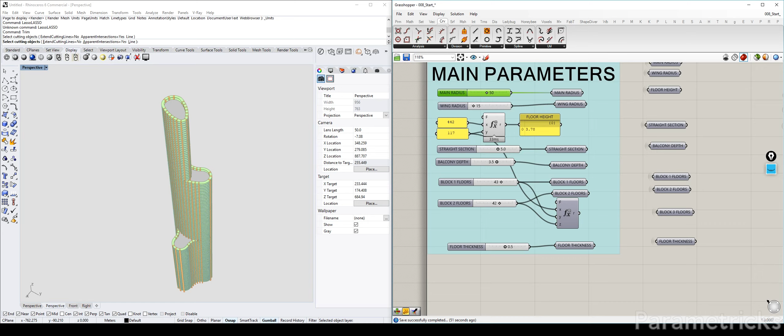Those are big columns, but that's because we specified the amount of columns in that section, which is defined—not by this one, but the secondary columns. Where do we define secondary columns?

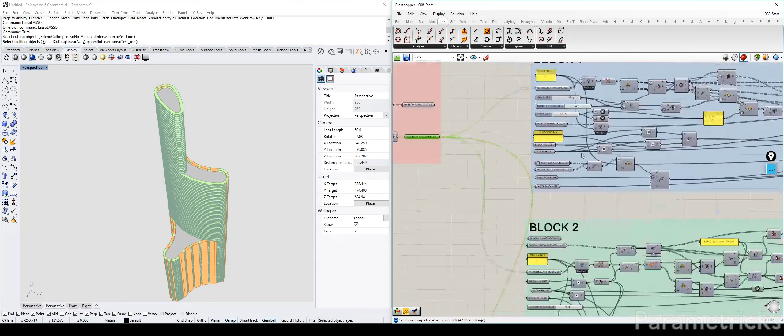Main column, secondary columns—I think it's somewhere here. Secondary arc setting out. Secondary arc. Oh yeah, we define the columns here. Okay, so we probably want 6, not too much. 10 is our maximum that we've specified in the sliders, but you can actually change that.

So I would say go crazy on it and do a lot of crazy stuff with it. So this is—well, the ratio is quite weird, but these are the values that you can all play with and then come up with your own variation of the World 1 tower.

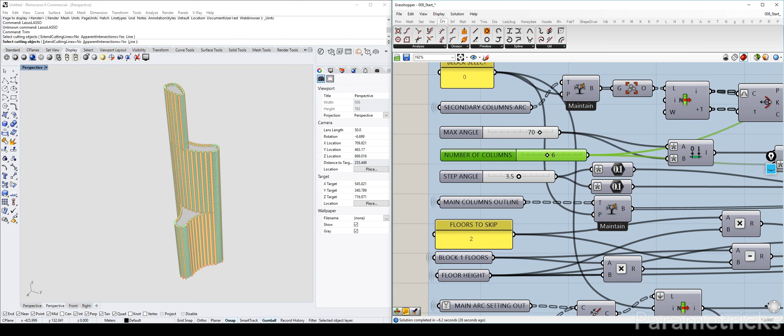So with that ends the tutorial, and I hope you've managed to learn some of the tricks during the course of the tutorial, or maybe learn something new, how you can do certain stuff.